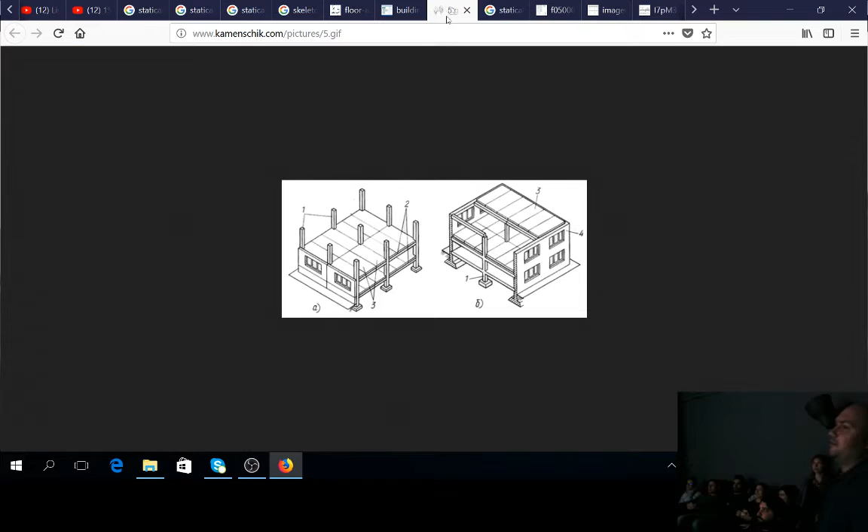So when this footprint is not sufficient enough, we proceed with the next type of fundament, which are line fundaments. We can make one fundament which connects several verticals. It's more rigid, it's heavier. For the fundament, it's important to be as heavy as possible.

And when this is also not enough, we'll have a base slab, which is one big slab of concrete under the whole building. And this is the most recently and most widely used type of base of the building, because it's most predictable. You can predict how the concrete will maybe move or crack, and how the soil will move under the building if this will occur.

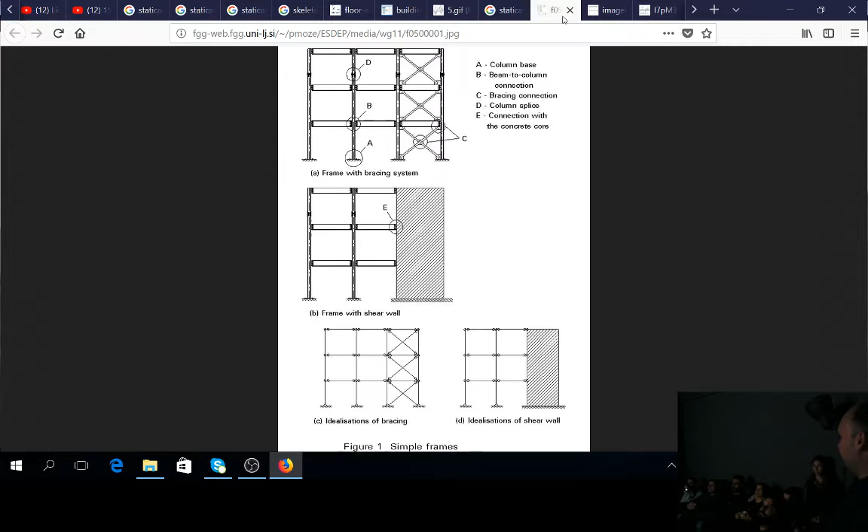So from the statical point of view, or from the calculation point of view, we have a base point which can or cannot rotate. Actually, for the fundament, it's important to know what the type is, and whether the column can rotate in the base point or not. Most of the columns do not rotate in the base point. They are rigidly connected to the ground.

So, for example, when you want to move the building, the base stays where it is. The first floor, or the floors above the fundament, moves laterally, but the base doesn't move because there is no way to go. There is soil all around, so you cannot shift the ground. There is not such a big force that can move that amount of weight of the soil and the base.

If there is such force, it will rip the ground. So yeah, we no longer talk about building, we talk about particles. So that's geological, your field. So we will assume that the base will stay where it is. Before the bomb, yeah, it doesn't matter what the forces are and how they will apply on the construction. The base will stay where it is.

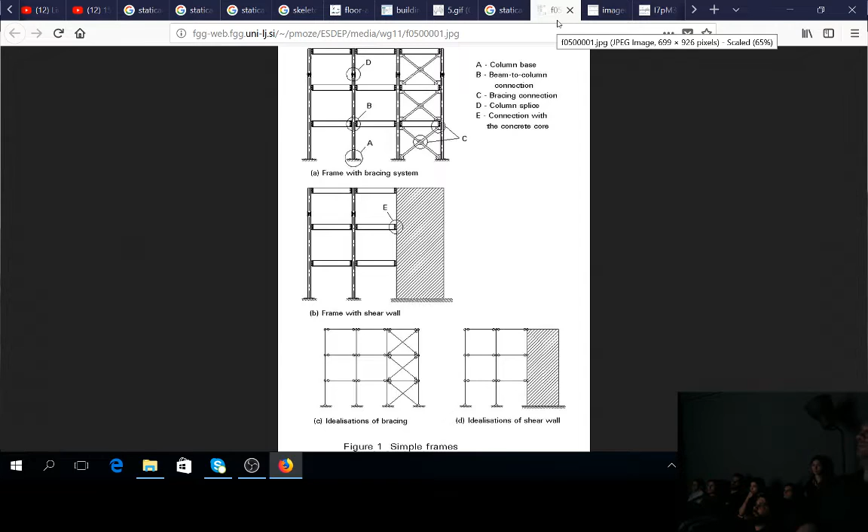So that's a space truss. That's a system of connections that actually holds the building in place from the lateral forces, from the wind and the earthquakes mostly. And this actually is the most important part of the building. In the typical building, we have a core made of reinforced concrete, which is a solid U or O shape structure, which typically holds the staircase and the elevator shaft. It's in the center of the building, and it will make sure the building doesn't shift.

The rest of the structure is only columns and beams, which are put together to hold the dead load, the vertical load. But the core holds the lateral movement of the building. So when you destroy the building, you make sure you destroy the core, because this is the most rigid part of the building.

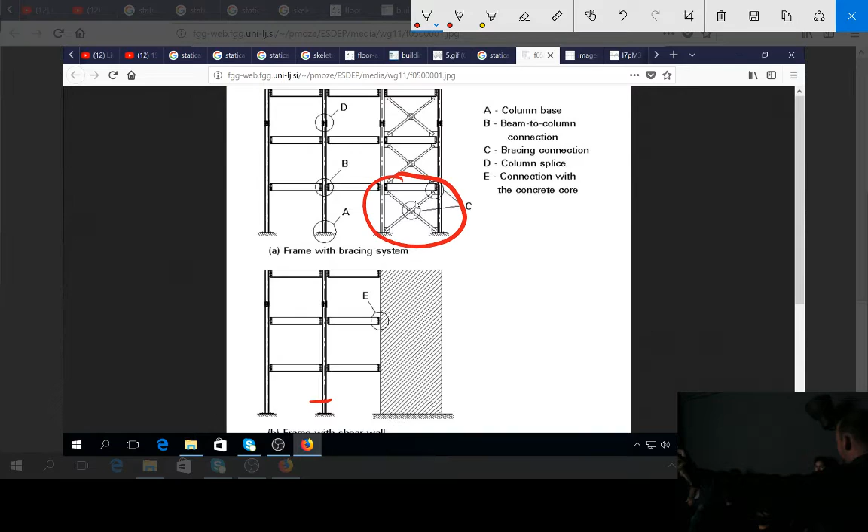Because you demolish them, for example, if you demolish that column, that space becomes empty, and the column from above starts to go down and pull on everything. That's a domino effect because the purpose of the column is to hold the vertical load, so there's no big section of the column when it starts to bend.

Starts to crack. Is that why it looks like that? It's like a globe, you know, when they demolish a big building it looks like that, like a globe just folding down.

That's the case. It sounds important because I don't think we take these things into account. We don't model the loading, the carrying structure, differently than just the walls. So if the carrying structure has something happen to it, it can pull everything else with it, while the rest of the stuff is much softer and easier to deform and destroy. We would get more of this kind of domino crumpling effect.

It's worth trying out. The thing is when you start making a building, you start with the bare structure. It's like in real life when people start building a house, they start with the structure, and once the structure is finished, they fill in the walls.

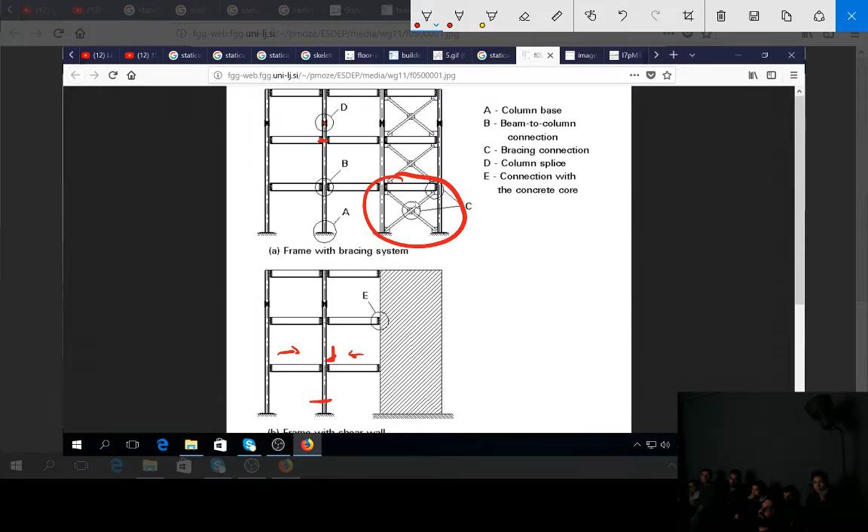You don't want it to be way more stronger, because in that point you bend that part, and the middle part stays really strong. You don't need this, because you need the structure to distribute the force evenly.

To be predictable, because when you make structures like a car, when the car hits something, you have to make sure it crumbles the right way. Here is the same. You have to make sure the structure bends or deflects in a predictable way.

And when you place these weird joints, which are really strong, they actually change the way the structure behaves. But we assume that this splice is as strong as the section itself, so it doesn't take into account some changes there or some anomalies.

Let's go back to the question: what happened in the base example? What happened if that part of the column disappeared for one reason? If there is no blast, if we cut it or pull it somehow, the weight of the rest of the structure has nowhere to go.

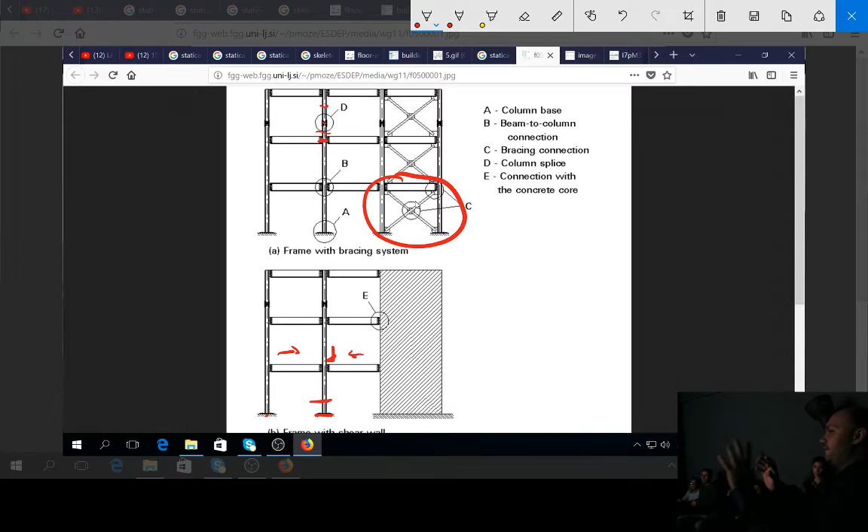The capacity of that column is not sufficient enough to withstand the bending of the slab, and actually the structure starts to go sideways.

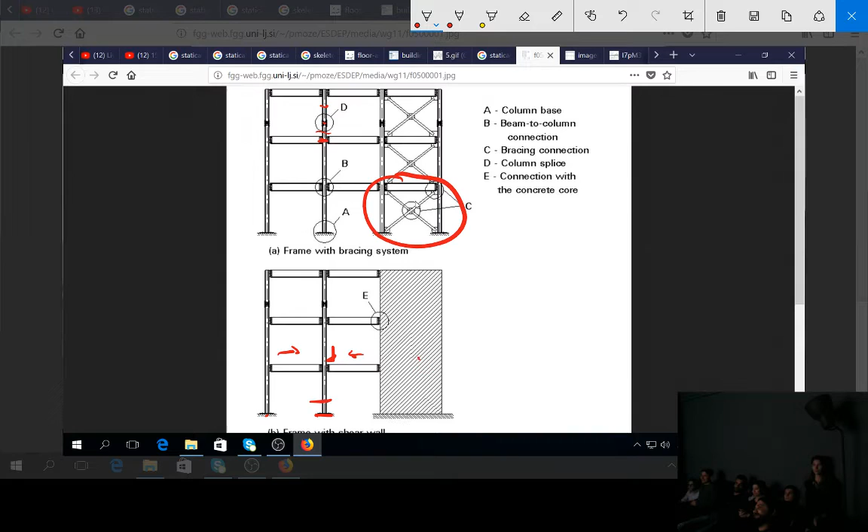That concrete wall will stay where it is. It's way stronger than the rest. So when you pull that column, nothing happens to it. What will happen is that the joints will tear apart, and that's it. We'll have a pile of columns and beams at the base, but the rigid structure would stay the same.

What happens if you demolish that part? Everything will fall to the right because there is no structure to hold the lateral forces. And actually the weight of that concrete part is way more than the rest, and will pull all the members to the void and will crumple.

Now, maybe one of the main questions that we were discussing is, what if there is a blast that hits a building at a higher point, and the foundation is still intact, and the bottom columns are also intact? But what happens if the top... how does it collapse from the top down when the hit was on a higher level? Okay, so initially, let's say we have a blast in the center of the building.

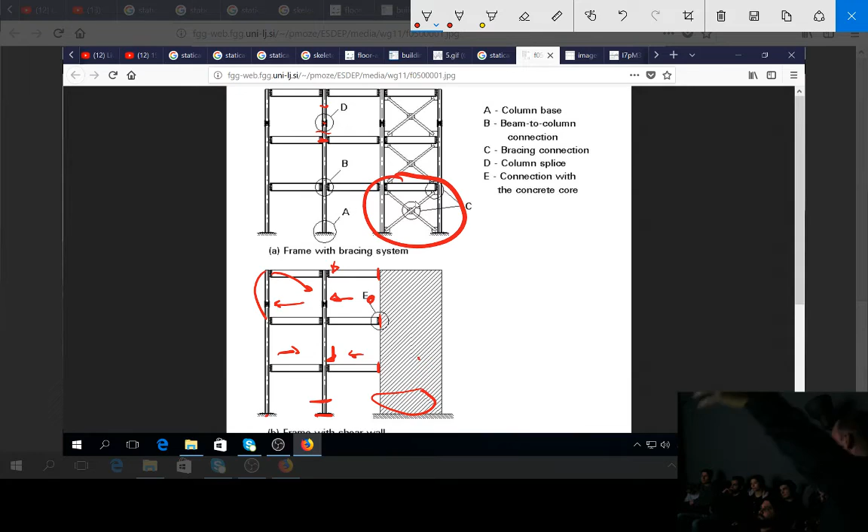Clockwise. And what will occur outwards is that the outer wall will come outside, and maybe more - windows and the frames. Yeah, but the ceiling structure, maybe some of the members will go there, but most of them will crumple. And if that wall is not that strong, that situation will be replicated on the right, but symmetrically.

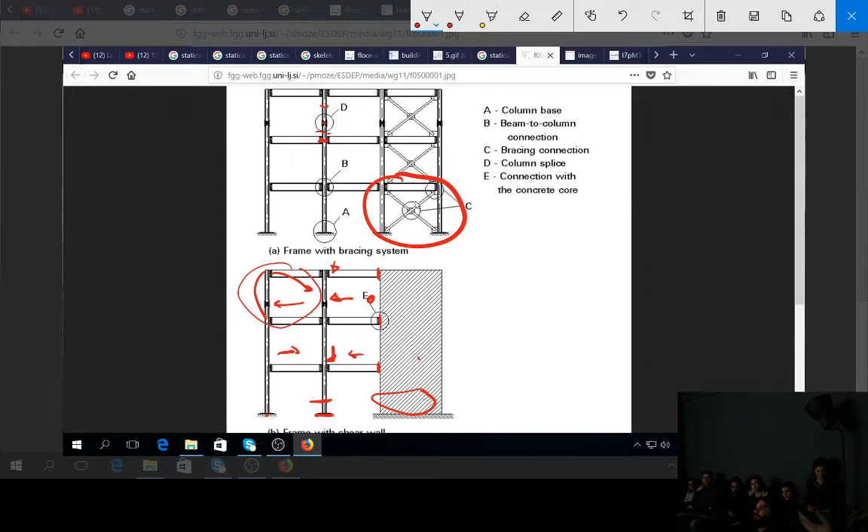So one element is the blowing aside of non-structural stuff, and the other element is the collapse of the building. The collapse of the building has logic, and logic is the opposite of the construction of the building. You start to demolish something, and it goes from one point to the next structures, and they fall in a logical way.

So when you make a model of the building, it's important to make the model of the structure. Or when you receive the model of the building because someone gave it to you, it's important to understand, at least to a large extent, what is the construction of that building. If the model has the internal walls and so on, you can recognize where the core is, and you assume that is the most rigid part of the building, and the rest is just envelope and partition walls.

And the core is the concrete part that holds the stairs and the heaviest structure. Typically, yes. You see the staircase, because sometimes staircases and elevator shafts are outside, not in the center of the building. It doesn't necessarily mean the core has to be in the physical center of the building. It can be shifted. Some buildings have that core actually on the perimeter.

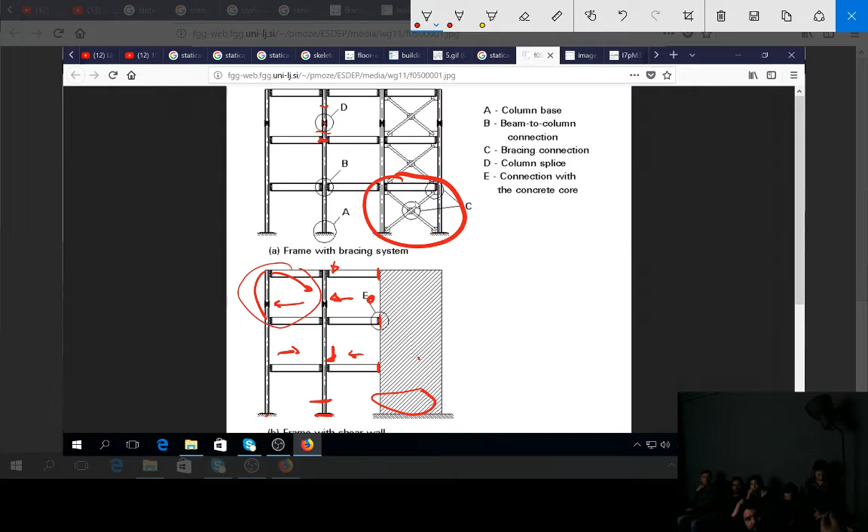But in that case, you have another core inside, because this is more advanced stuff. But if you have a building, and that's the core...

Let's say you have wind which blows from one direction. That's the top-down view, the plan view, and that's the elevation. Really basic, but that's the way it is, and that's how the wind bends like this.

But if the building is like this, here's the core. If you have the wind, the building will rotate, because we have a concentrated stiffness origin in one of the corners, and the building will rotate - twist. How much is it, like a sector angle, or just a generic average number?

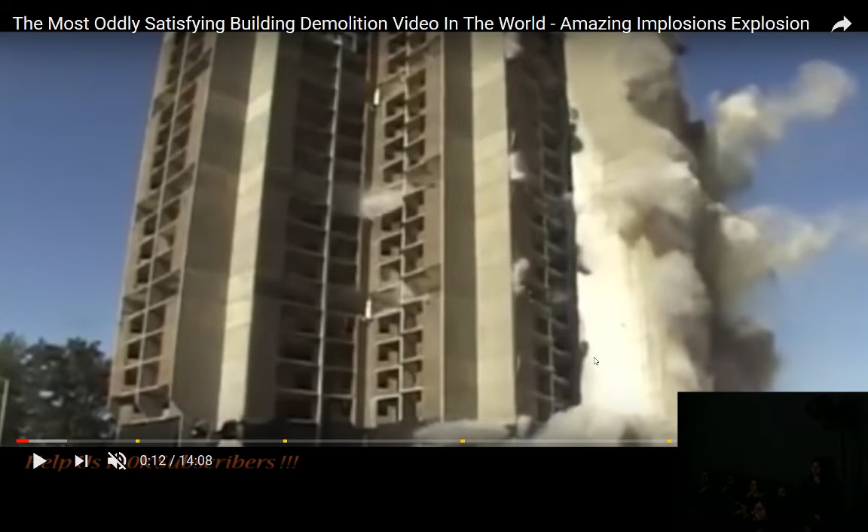Okay, that was a close angle, but what we see here is that they demolish some of the structural members, mostly columns, and they want the columns to disappear in a second, and under the slab to become a void. The main force in demolition is dead weight, it's gravity - gravity does most of the work. You want the building to behave in such a manner that gravity will place it in its footprint, not away, but at the base of the building. Otherwise, it will become dangerous, at least.

So there was a thing which happened with the last building there, where it went to the side. Yes, in that example, you demolish it because it's a building with several cores. In big buildings you don't have a uniform shape, a uniform core. Of course, you divide it in several pieces, and you demolish, for example, the right part.

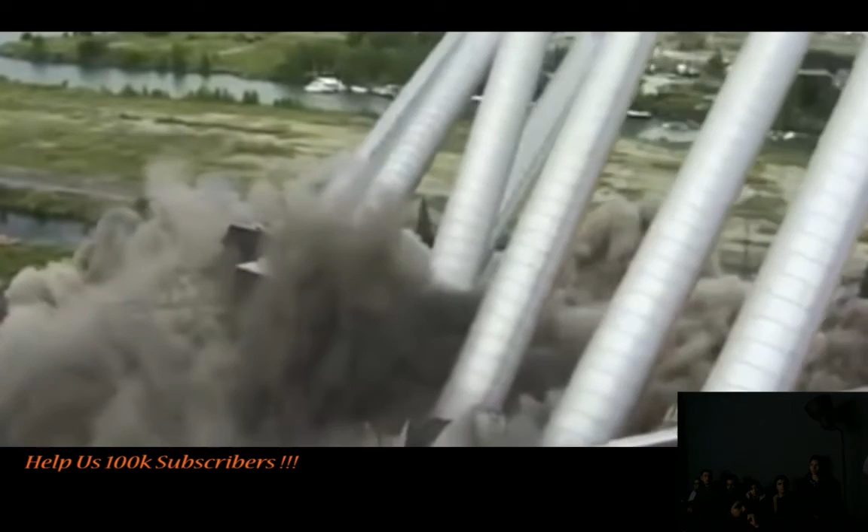And in the 9/11 case, when the plane explodes, it ruptures the load-bearing part of the building from one side. That was one problem. And that initial blast actually compromised some of the columns. But the bigger problem there was that the heat from the fire eventually started to compromise the steel itself, because steel is really weak to temperature. That's why fireproofing is really important for steel structures.

The case there was that the external walls were compromised, and the floors started to go down like pancakes. Eventually the structure below cannot hold the weight and starts to go down. Once that happens, there is no turning back. So if the plane had actually hit the top floors, it wouldn't fall. It depends, if it hits, let's say, the top two, it won't happen. But for the lower tower, I think it happened at 2/3 of the height, so there's quite substantial weight above the compromised point.

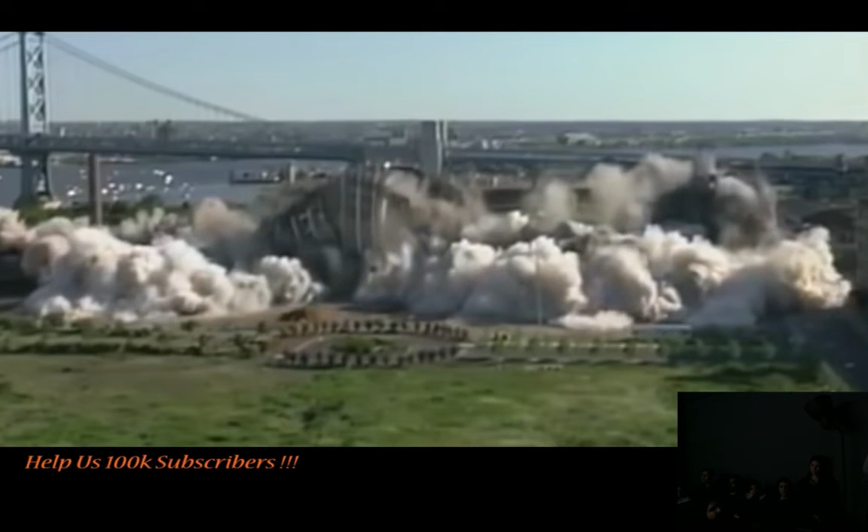You said more than two floors have to fall. This is a basic rule. It always depends, because in 9/11 there were thin floors made of steel trusses and a thin concrete slab. So they are lighter than the typical floor, but typically more than two are needed.

And any advice about when we model stuff on the inside, the structure, the thicknesses of the supporting elements compared to the building? Because this would be very useful for us when we model. Most of the time we either have reference pictures of the building from the outside, or we have ready models which do not contain stuff on the inside, so we have to model the supporting structure. And for us it's important to make them with proper thickness, so they're not too big or too small.

From your point of view, if you want a more exciting view, it's important to make the core of the building and the outside walls. If you start modeling the partition walls and so on, it's only going to make the model heavier, but it's not more structurally sound. It's not that important, because you want the blast to go outside.

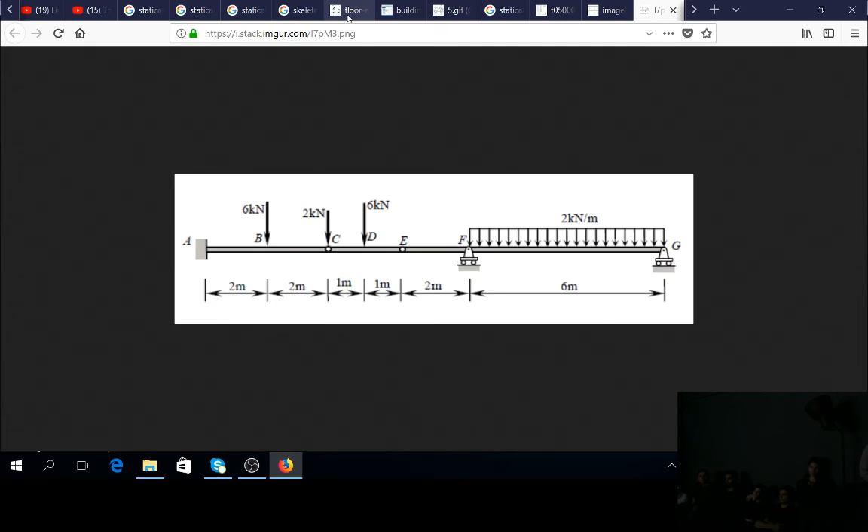So that's a very important moment here: when an explosion hits something in the core, the heat will pulverize the concrete, but then the outer parts will go towards that and down from the force of gravity, and the rebars will try to hold them, and that will pull the outer walls. Every slab is supported by the columns. If you demolish the columns below, the slab will go. For example, here.

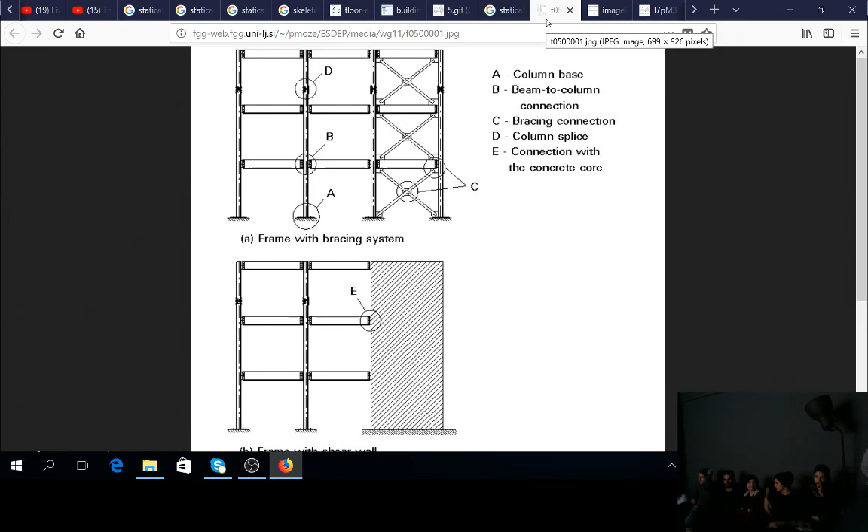Meaning that walls connected with rebars and concrete will not fly away because they are too heavy, and they will just collapse? It depends where the blast is. The concrete above the blast will, of course, fly away. If it's two stories below or in the next part of the building, it won't. It will just bend and crack, but it won't vaporize. Only the closest things.

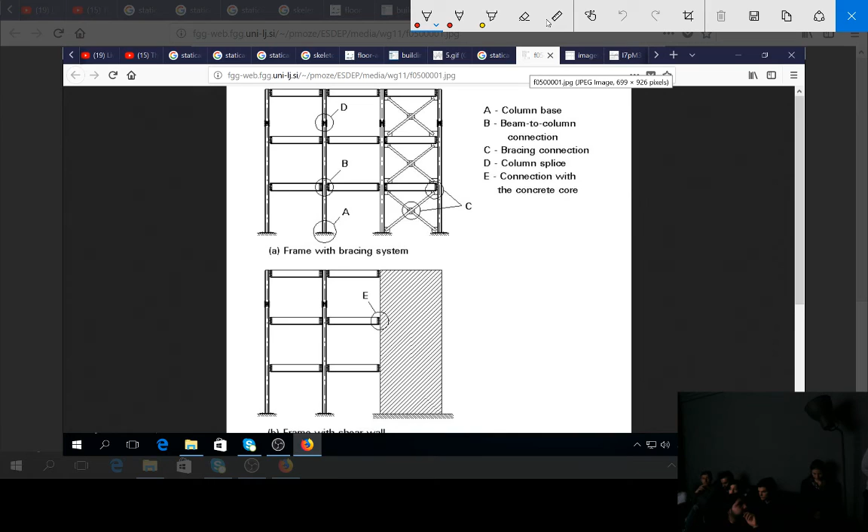So if there's a big flat surface with a big blast wave near it, and it doesn't have enough room to escape, this big flat surface is basically going to be moved by all the energy as it is.

Of course, yes. It won't move, it'll get bent and pulverized. So there's a good case for Vlad's roof. We have a roof where we detonate something underneath it, and we're blowing away a piece of the roof because it looks visually interesting, but we're kind of stretching it, like, can a big slab like this get completely, you know, 20 meters, 30 meters away as a whole? That's why we moved it into a big questioning piece.

It wouldn't go that way. Actually, there is a case like this. There are slabs thick enough and strong enough that will just fly away. Chernobyl is that case. It's a 1.5 meter thick slab which holds the top of the reactor itself, and when the pressure in the reactor got bigger and bigger, it blew away the top. But the lid actually stays intact. It tumbles somewhere, but it's strong enough to withstand that. But that's really a rare case.

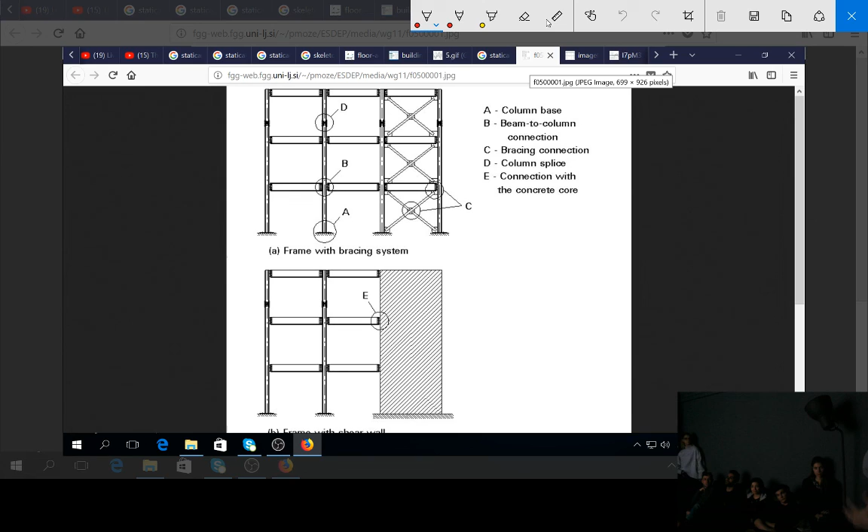When you see buildings from the war which are demolished, you see that there is a missing piece of the structure, and the rest are just hanging on the core. And that missing piece is pulverized because of the energy.

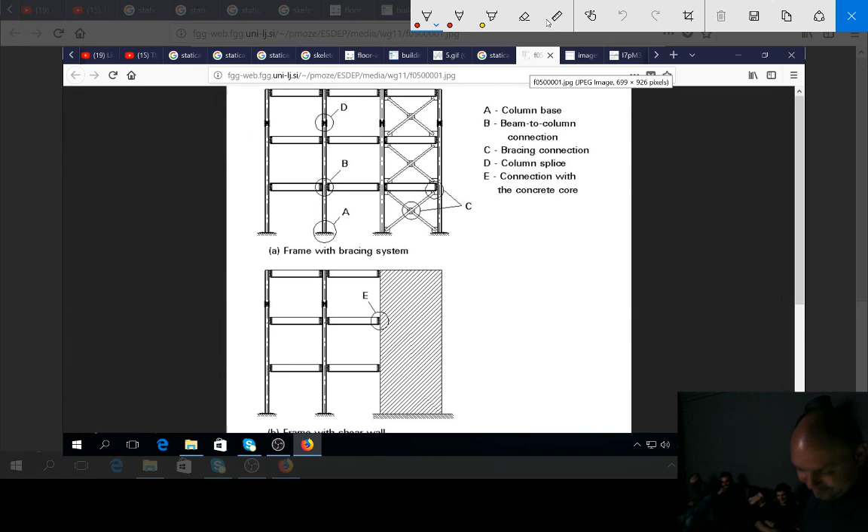Okay. That's why I guess there's so much dust that you see in these pictures. It's not dust from hitting the ground, it's from concrete exploding. Yes, because of the concrete. It's not home dust, it's concrete. It's cement. Actually, cement keeps this building for like centuries. Yeah, so that's the cement. It's pulverized.

Interesting stuff. Any question, anyone? And what about the other?

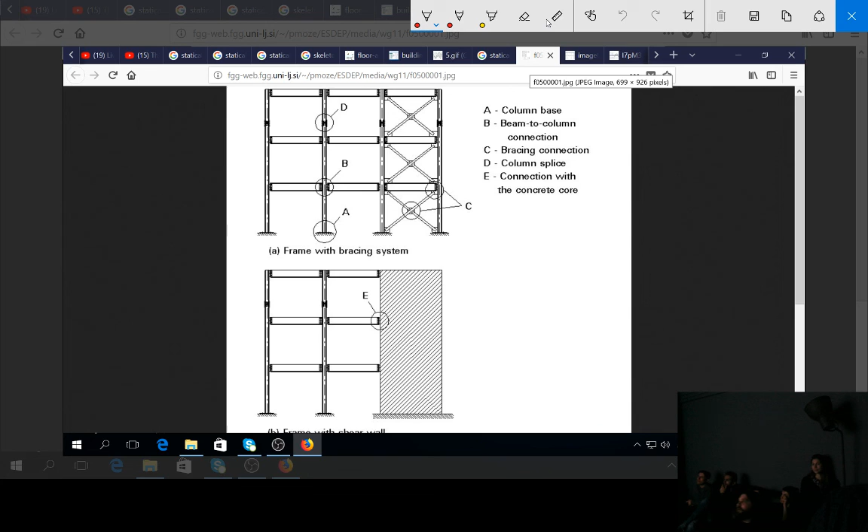You get many different schemes there. The first one is typical steel structure. No, I mean on the top, the other tabs. Yeah, you have different schemes. Okay, and you only showed this one when you were passing through. This explains actually the basics: what is floor, what is the base, and so on. This is how it's constructed.

You place the base, then the columns, then the beams, then the slab, which depends on the structure of the building. You can have beams and columns, and on top of them slabs, the floor and the ceiling. Or you don't have beams and you have one big slab, which actually has the purpose of the beams. So it depends on the construction.

And generally, are the columns made out of thicker or stronger concrete than the interior walls? No, it's the same. Typically, they're the same grade. Actually, in most cases the columns require a higher grade than the beams, because the concrete itself is better at withholding pressure than tension. Pressure is like pushing it to the ground. Yeah, compression rather than tension.

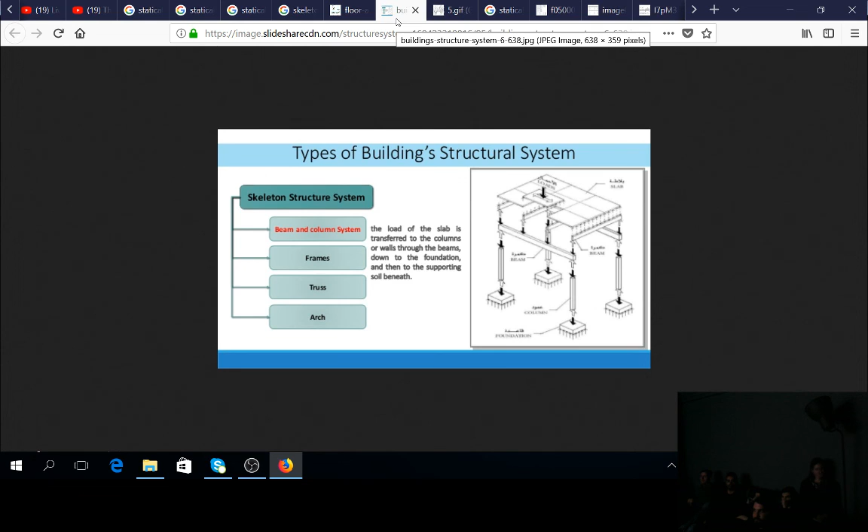Cool. This was it. What else? I think that's it for now. Yeah, it was quite comprehensive. So thanks. Thank you. You're welcome. Good stuff. Let's get a drink. Cannot wait. Stop.